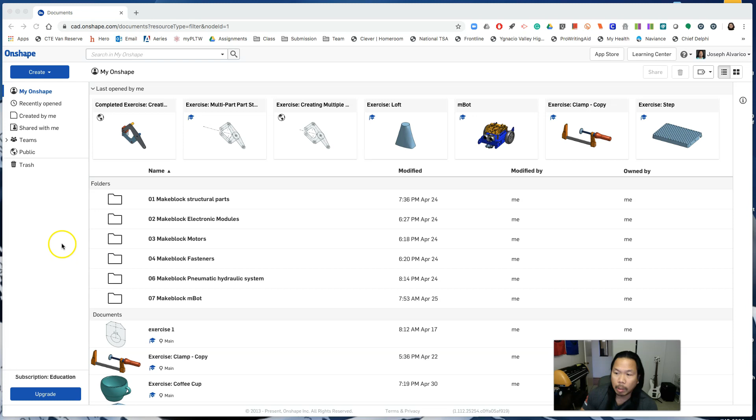For this next lesson, we'll use the drawing that you made in the Multi-Part Part Studios exercise. And from one sketch, we can create 5 unique parts from it. So open up Exercise Multi-Part Part Studios, click on the Document menu, click on Copy Workspace, and change the document name to Exercise Clamp. Click OK.

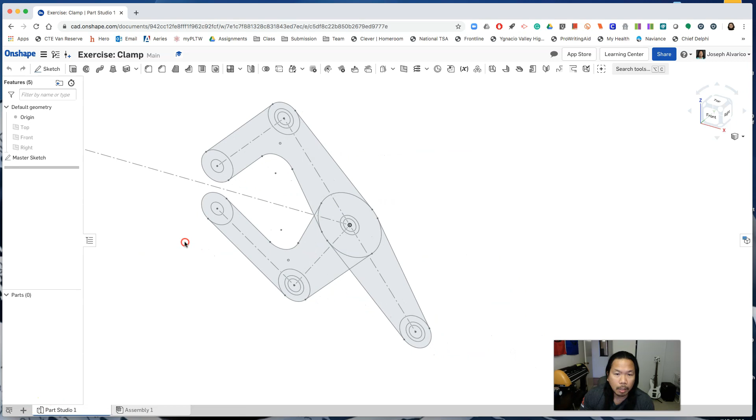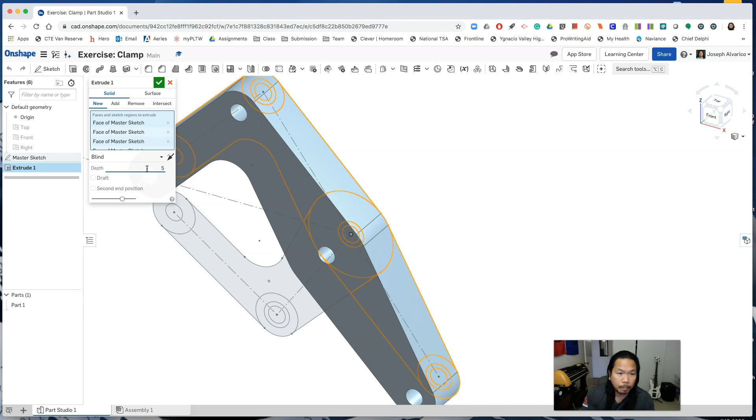Okay, move the clamp to the center of your working area. Click on the following parts. So the only part not selected would be the smallest circles. Now click Extrude, and we're making a new solid with a depth of 5 mm. Accept the part and rename Part 1 to Large Arm.

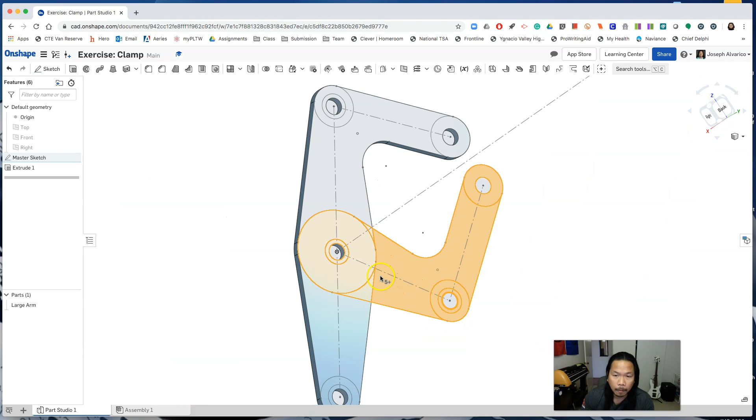Okay, turn on the master sketch. And then let's extrude the small arm. Select all of the parts except for the small circle. And do another extrusion, but extrude in the opposite direction. Make sure you're making a solid. Click on New, because this is going to be a new part. And then a depth of 5 mm. Then click Check. Change the name of this to Small Arm.

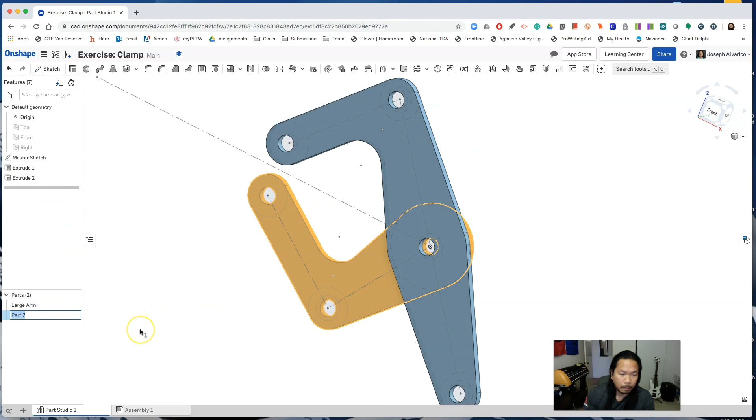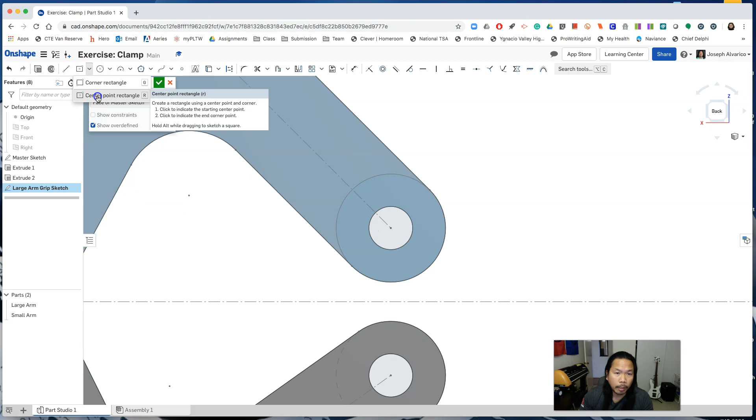Now create a new sketch on the face of the large arm. And then change the name of this sketch to Large Arm Grip Sketch. Right click on the sketch plane and view normal to sketch. And zoom in to this circle of the large arm. Now we'll draw a square coming from this center point of the circle. Select Center Point Rectangle. Move your cursor to the center of the circle and hold the Alt button as you drag the square. Holding the Alt button will make sure that you are drawing a square.

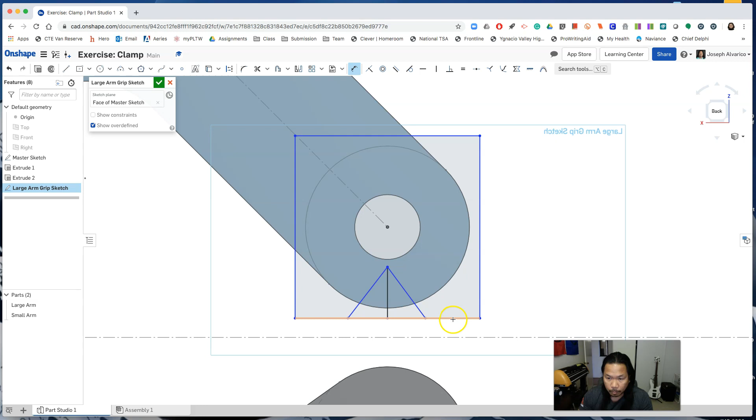Next, click on the Line tool and look for the midpoint of this line and draw a vertical line up. Click on the Line tool again to draw a triangle. Now let's dimension. From the bottom of this square to this line from the master sketch, put 1. And then this vertical line, type 10. And from this point to this point, type 10 as well.

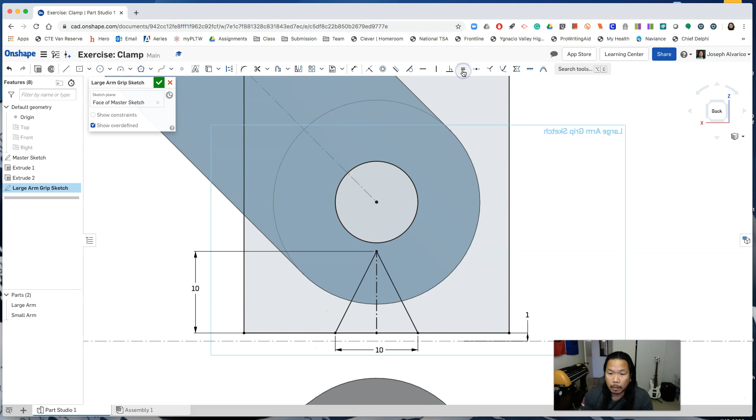Now click on this circle and click on Use to project that circle. Click on this line and click Construction Line. Change that to a construction line. And click on these 2 diagonals and click Equal. Now that should fully constrain your drawing. Accept the sketch.

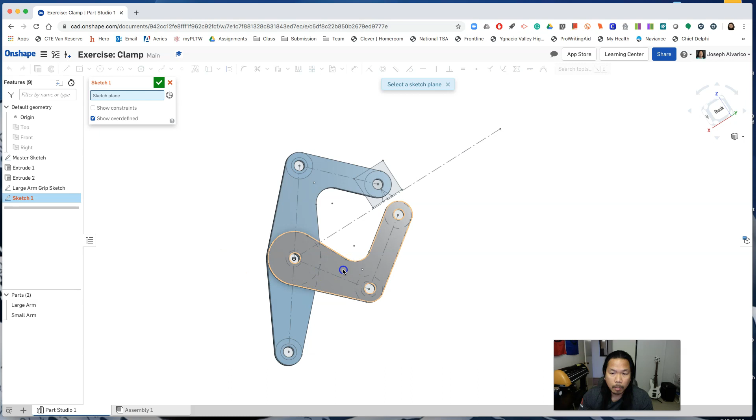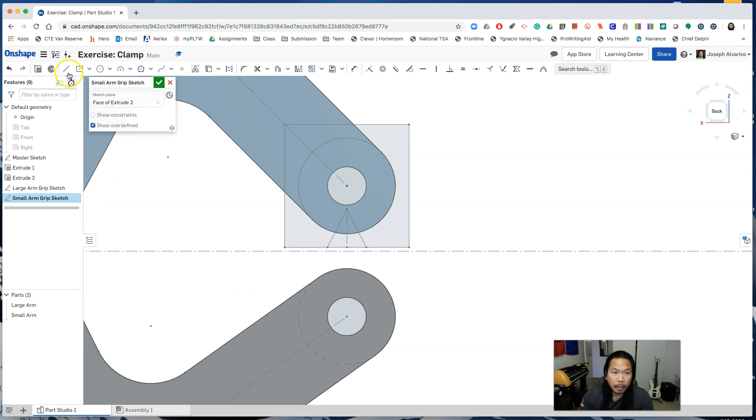Okay, let's start a new sketch, this time on the small arm. So sketch, click on the small arm, change its name to Small Arm Grip Sketch. Right click on the plane, view normal to sketch. Zoom into this circle. Let's draw something similar. Select Center Point Rectangle. Start at the center of the small arm circle. Hold the Alt key, click and drag.

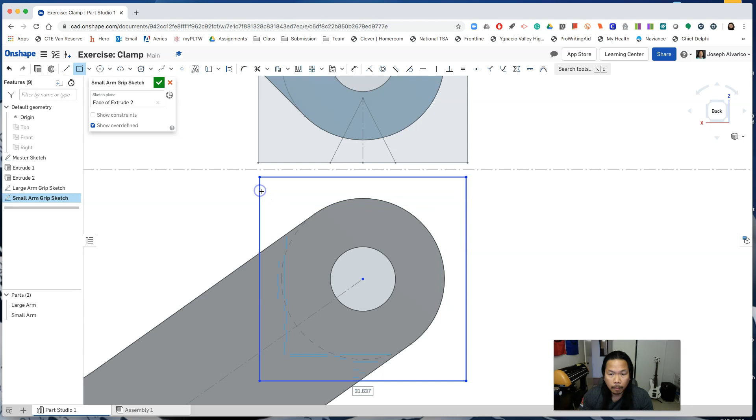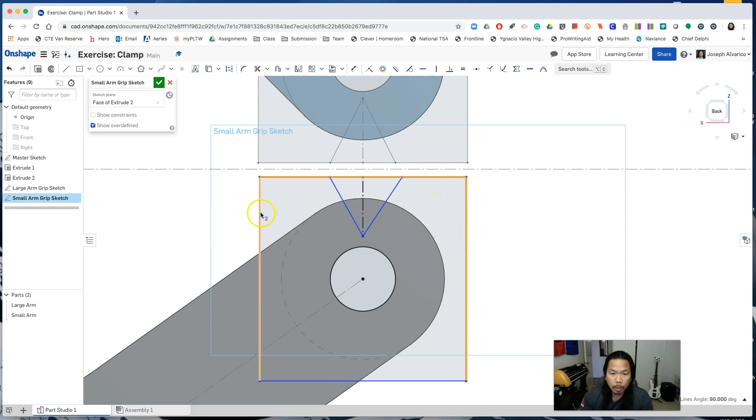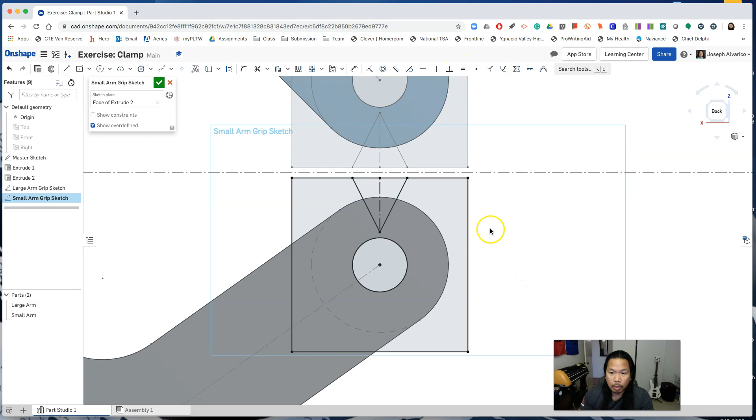Next, draw a vertical line coming from the midpoint. And then complete the triangle. Change this line to construction. Select this circle and click Use to project the circle. Select all of the sides of the square and click one side of the square you drew a while ago and click Equal. Click on the diagonals and click one diagonal from the drawing you had before. Click Equal. And then click on the construction lines. Click Equal. That should fully constrain your second drawing. Accept the drawing and go back to the isometric view.

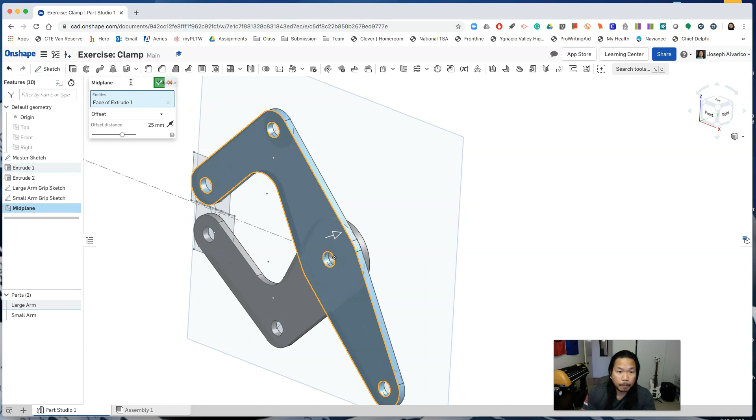Now let's create a reference plane. Click on New Plane, and for your entity, click on the large arm and then offset it by 25 mm. And make sure that direction is going this way. Now change the name of the plane to midplane. Accept the plane.

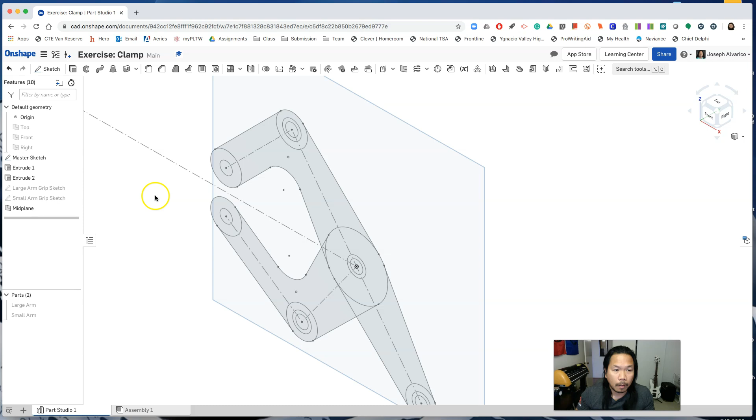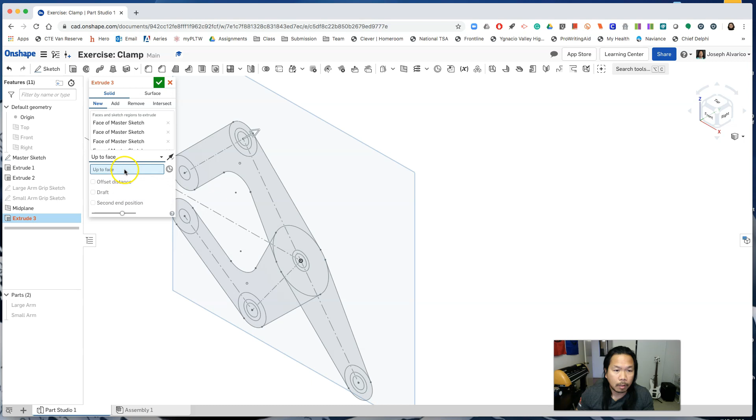Now we'll draw 3 new features from the master sketch. So hide the large arm grip sketch and the small arm grip sketch. We just need the master sketch. Zoom in. Hide the small arm and the large arm at this point. And then select the following circles. Once selected, click Extrude. Make sure you're extruding a solid, new, and then change the direction to the opposite direction. Change Blind to Up to Face, and for the face, click on the midplane.

Turn on the large arm and the small arm, and you'll see how the pin goes all the way to the midplane, but it doesn't go through the small arm and the large arm. So we need a second end position. So click on Second End Position and select Up to Face and click on the large arm. Now click Check and you'll see that the pin goes all the way to the large arm.

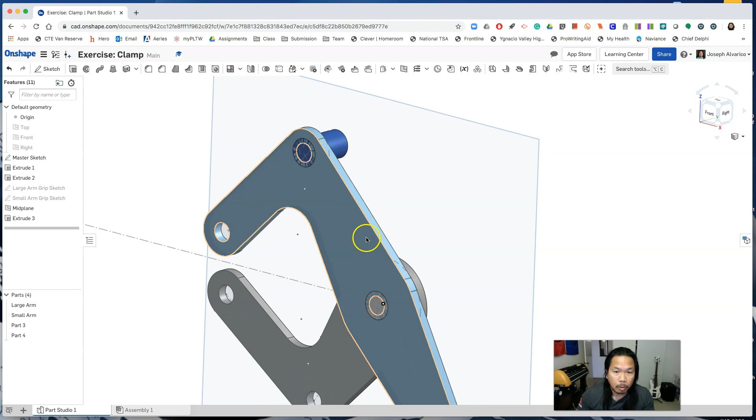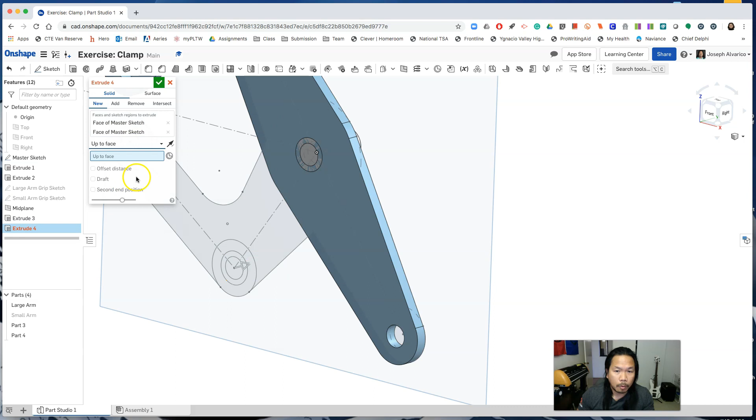Now let's create a third pin. Hide the small arm and select the following circles. Click Extrude. We're doing a new solid facing the opposite direction up to the midplane. And that's what we get. Click on the small arm and you'll see that it actually starts from the small arm already. So there's no need for a second end position. So click Check. So now we have 3 new parts.

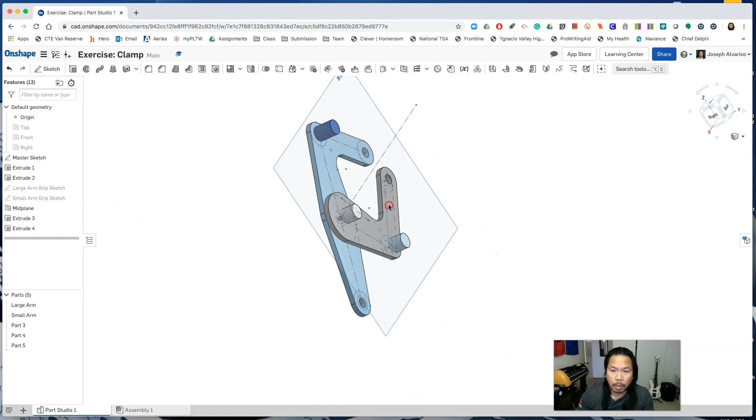Let's rename the parts. Part number 3 is the large arm pin. Part number 4 is shared by the large arm and the small arm. It's called the pivot pin. And part 5 is the small arm pin.

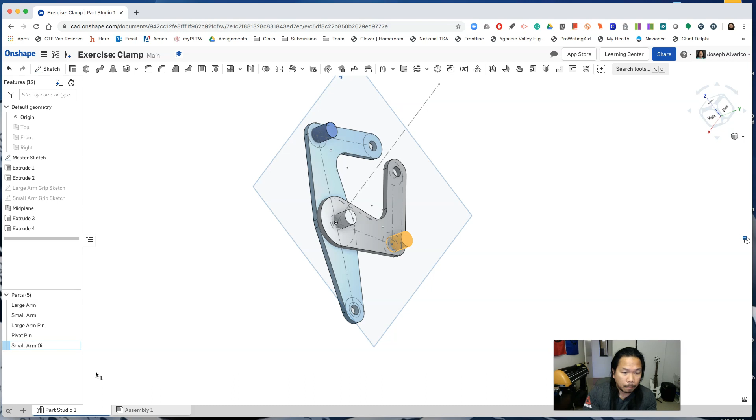If you zoom in, you'll notice that the pins are interfering with the arms. We are going to use the Boolean function in order to resolve that. Click Boolean, and we're doing a subtract.

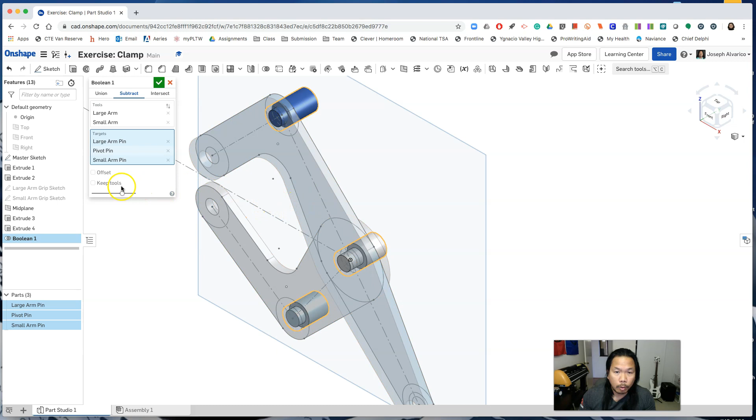And for the tools that we are going to use to subtract, we'll click on the large arm and the small arm. And the targets, the ones that we need to subtract some parts to, would be the large arm pin, the pivot pin, and the small arm pin. Notice that the large arm and the small arm became invisible. We want to keep those tools, so you click on Keep Tools and click Check. And notice that the interference disappeared.

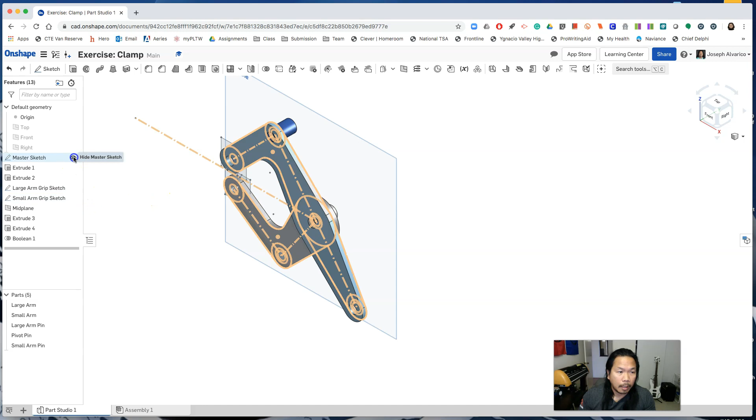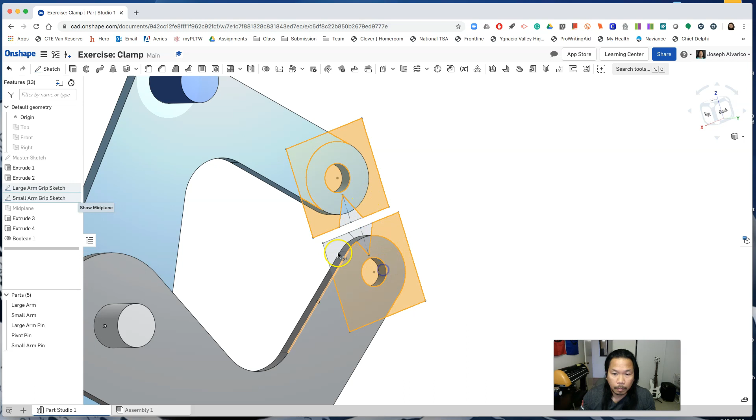Now let's create the grip. Turn on the large arm grip sketch and the small arm grip sketch and hide the master sketch. At this point, hide the midplane for now. And now select all the profiles. The only thing you're not selecting would be the triangle. And turn on the midplane again. And click Extrude.

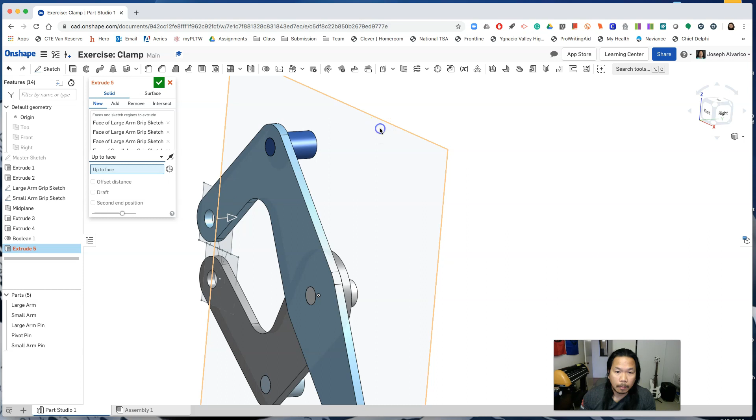Reverse the direction. And then for the depth, click up to face, and click the midplane. So make sure that this is a solid and we're creating new part. We're not adding to any of the parts that we've done before. So once you confirm it's solid, new, up to the face midplane, click check. And now you have two new parts.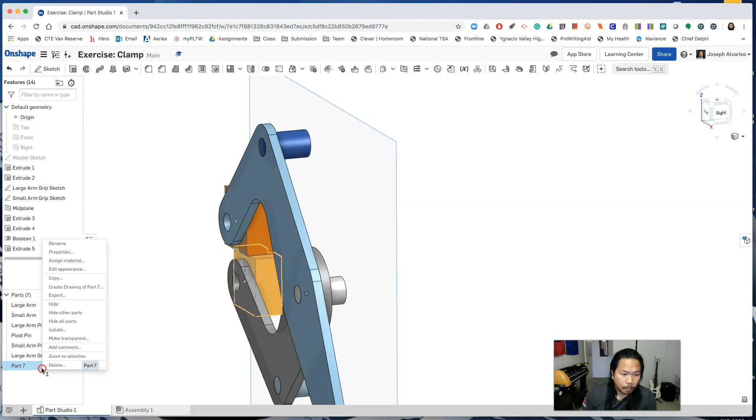Let's change the names to large arm grip and small arm grip. This is how your drawing should look like at this point. Okay, hide the two sketches and let's move on. Hide the large arm and show the large arm grip sketch.

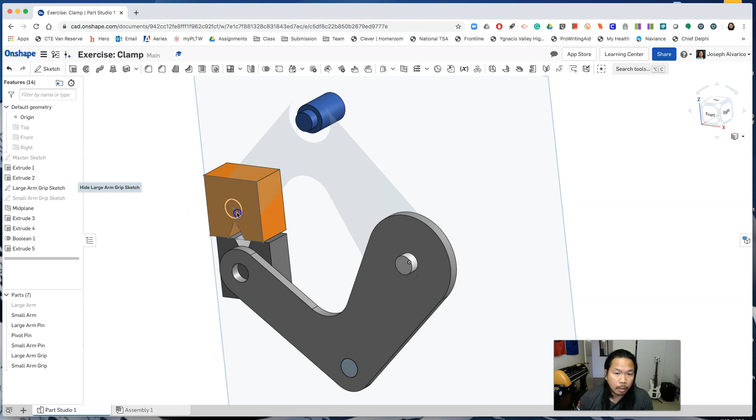Select the circle and click extrude. We're creating a solid, but this time we're just adding. So turn on the large arm again. So click here and then change it to up to face. And for the face, click on the large arm. So we want that extrusion not to go beyond the large arm.

And this is not new. We're just adding to an existing part. So click add, click on merge scope, and we are adding that up to the large arm grip. And then accept the feature. Now let's hide the large arm, and you'll see that the grip now has this pin sticking out of it.

Let's do the same thing with the small arm grip. Hide the small arm. Turn on the small arm grip sketch. Click on the circle. Turn on the small arm. Click extrude. We're just adding this. So up to the face of the small arm.

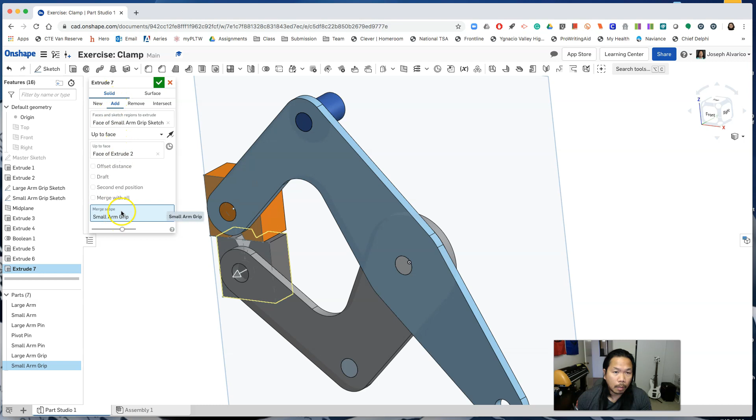Okay, revert it to new. We don't want a new one. We want to add it. Click on merge scope and we want to add it to the small arm grip. So before you accept this feature, make sure it's solid that you're adding to the small arm grip. Click check. Now hide the small arm and you'll see that you have this pin sticking out of the small arm grip. Enable the small arm again and hide the small arm grip sketch and the large arm grip sketch.

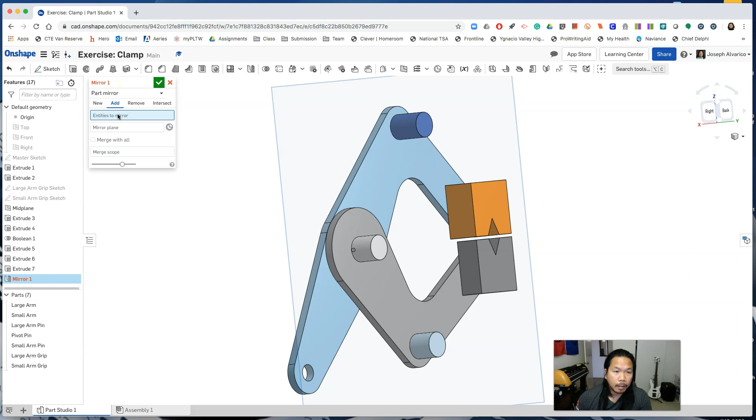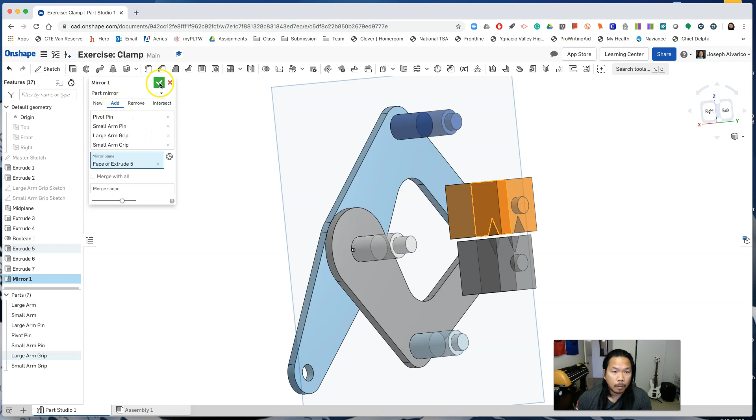Now let's mirror some parts. Select mirror, click on part mirror, click add, click the entities to mirror as the large arm pin, the pivot pin, the small arm pin, the large arm grip, and the small arm grip. And the mirror plane will be the surface of the large arm. And then before you hit check, make sure that you're adding and you're not creating new parts. So click check. So that's how it looks like so far.

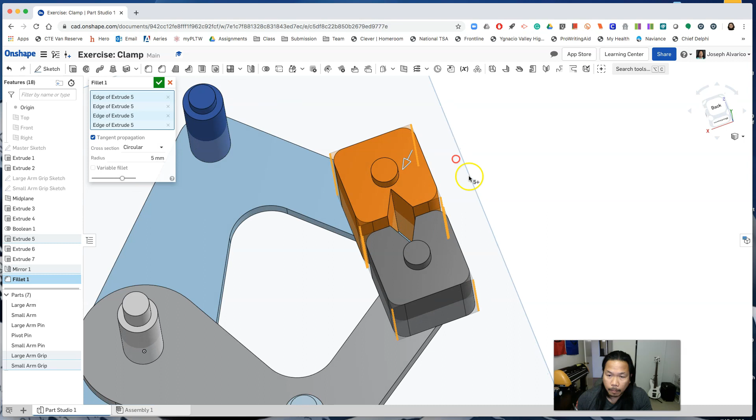Now let's fillet the edges of the arm grips. Click fillet. Fillet the edges and add this part of the triangle. Change the radius to 5 and accept the feature.

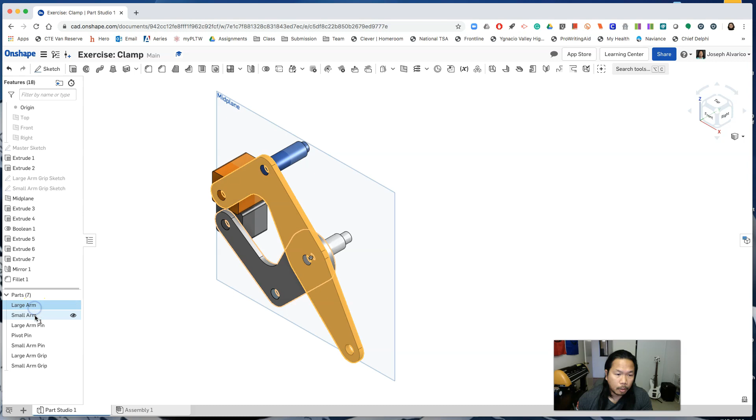Now select all the parts. Large arm, small arm, large arm pin, pivot pin, small arm pin, large arm grip, and the small arm grip. Right click, assign materials for all 7 parts. Choose aluminum 1060.

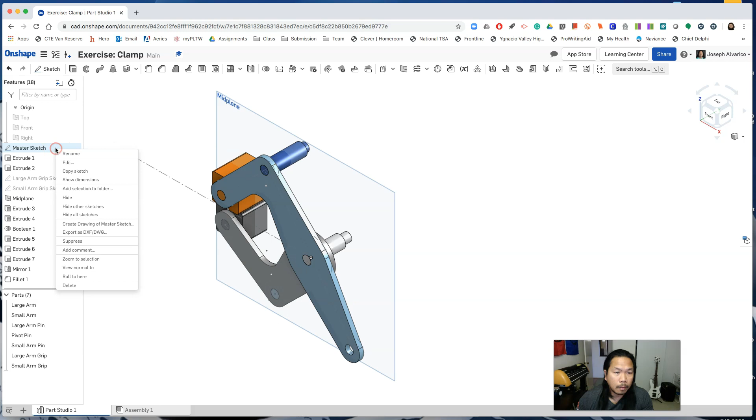Accept the material. So just a recap, what you've done so far is from one master sketch, you were able to draw 5 unique parts, and you created 2 additional sketches to make the large arm grip and the small arm grip. Now let's make some design changes to understand the full effect of using a master sketch to drive several parts and features. So click on master sketch, turn it on, and edit. Then right click, view normal to sketch.

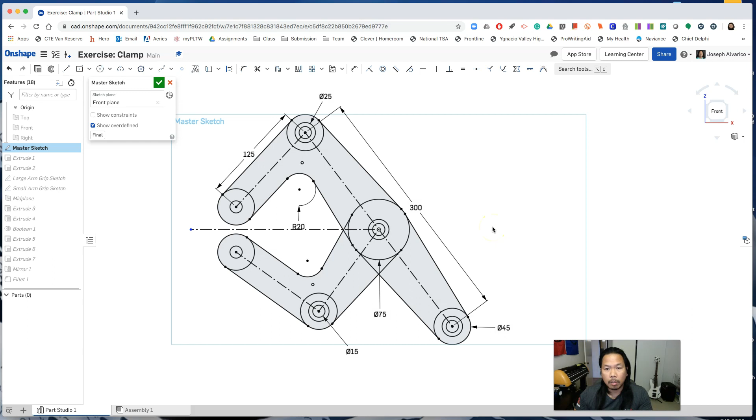Now change all the dimensions of the sketch. Notice that with all the changes on the dimensions, the drawing just adjusted itself. Accept the changes and see how the drawing adjusted itself as well. Edit the midplane, change the offset distance to 35, and even the pins adjusted itself as well.

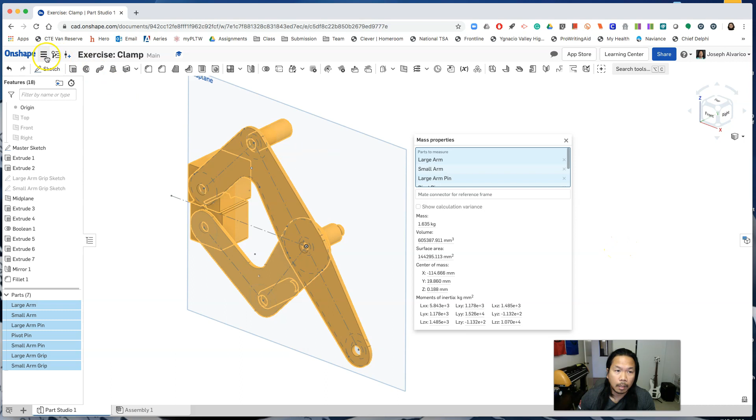So that concludes our lesson for now. Select all the parts and click on Mass Properties, and you should get this number right here. Now take a screenshot of your work, plus the mass properties and your name, and then send this to albericoj@mdusd.net. Now close your document, and we will use this to create an assembly.